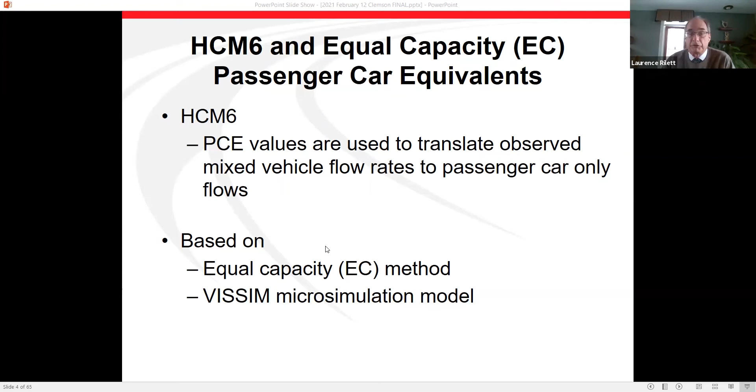This is the setup for the modeling done in the HCM6. You can see this is the standard model they use — an 8-mile section of flat road, then grades, with detectors at different lengths so they can model what happens at different grade lengths, and a level section at the end. They basically did a lot of simulations, and I'll talk about how many in the next few slides, but this is the general setup.

They can change the grade, change the grade length, change the volume, and the output from these simulations are what went into the HCM6. So when you're using PCE values from HCM6, it's actually coming from a VISSIM model — we'll go into more detail in a few slides — but I wanted to point out that this is a rather new way of approaching capacity and PCE calculations. There's a lot of innovation involved with it.

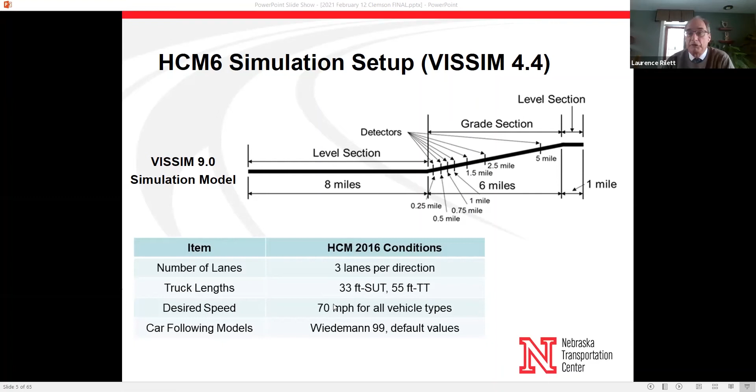What's interesting from the Midwest point of view is that the HCM6 was set up for 3 lanes in each direction, with a desired speed of 70 miles per hour for all vehicle types, cars and trucks. I'll explain why in the Midwest this may cause some issues when we go to use the values in the HCM6.

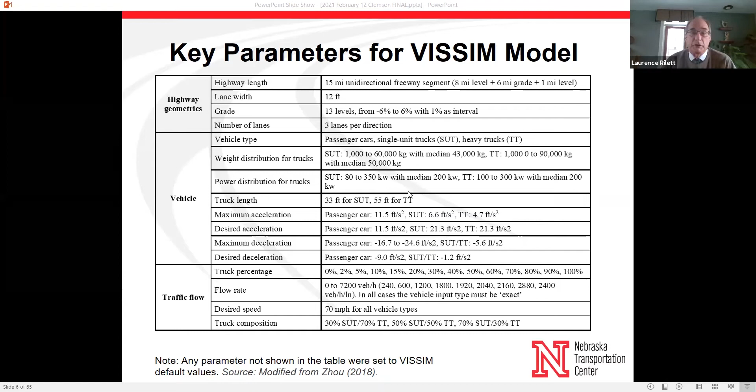Here are the key parameters for the VISSIM model. I only put this up not to go over each one, but to show you how detailed it is — geometric data, vehicle parameters, traffic flow parameters. It's a fairly sophisticated approach, as anyone who's used VISSIM would know. There's also driver behavior, data collection parameters, and simulation procedures involved.

I'm not going to go into great detail, but I did highlight one thing: the aggregation interval was 1 minute. So when the developers of HCM6 were developing the passenger car equivalents and capacity values, they used an aggregation level of 1 minute, which is new for HCM6 — historically it's always been at a 15-minute level. That was noticeable to us, and I wanted to point it out because some of the numbers may not coincide with what we're used to, since they chose a different aggregation level.

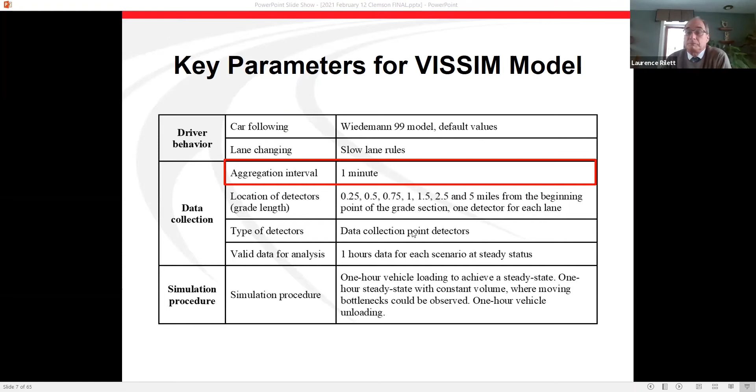To do the analysis and get the PCE values, they ran a number of scenarios using the VISSIM 4.4 model. They did passenger car only conditions: 91 scenarios with 13 grade levels and 7 distance levels. They also looked at 3,549 scenarios for mixed traffic with cars and trucks, varying grade levels, distance levels, truck percentage levels, and truck composition levels—the trade-off between single unit trucks and tractor trailers. All told, they did 3,640 runs using that VISSIM model and geometric design I showed earlier.

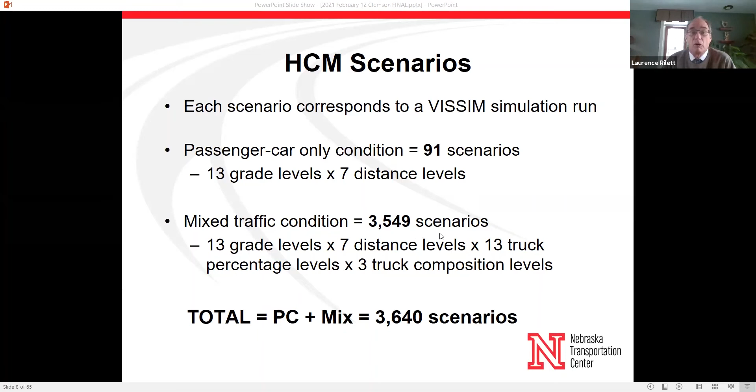Once they got that, they could calculate the PCE. The PCE value is a function of the capacity values obtained from VISSIM. For those 3,640 runs, they developed the capacity, and from that, calculated the PCE. It's easiest, I think, if we show it by example.

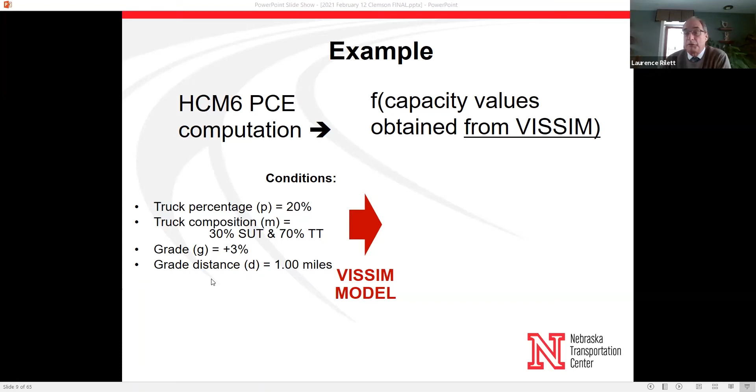In this case, I've taken a truck percentage of 20%, a truck composition of 30% single unit and 70% tractor trailer, a grade of 3%, and a grade distance of 1 mile. Once you have those parameters set, you can go and run your simulations, which is what the developers did.

Here's the passenger car only results. These are simulation results. On the y-axis is flow rate in vehicles per hour per lane. On the x-axis is density in vehicles per mile per lane. They ran different volumes—the green ones are low volumes, the red ones tend to be higher volumes. But you can see it's a fairly standard linear flow rate density curve.

From that, they calculated capacity, and that's the red line at 2,268 vehicles per hour per lane.

The other key point on this figure is that in HCM6, they took capacity when calculating PCEs as the 95th percentile flow rate instead of the 100th percentile. It's our understanding this is the first time this has ever been done in the HCM. I could be wrong, but it was unique to this characteristic, or to this section of the HCM.

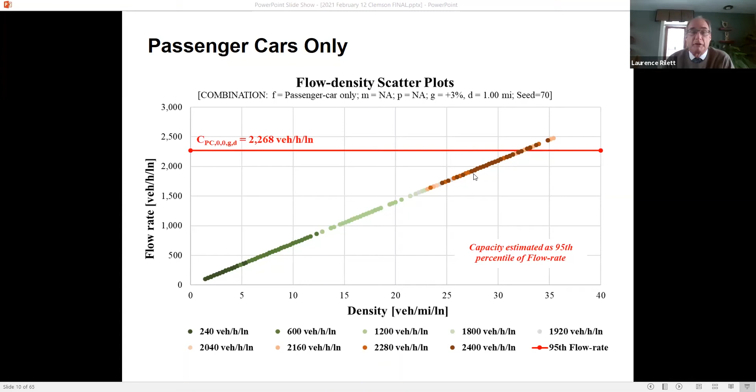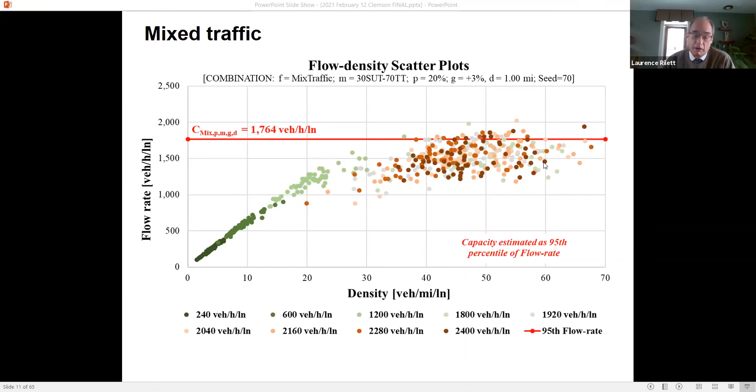Once you have those two capacities, so you do your conditions and get the capacity values, they then calculated a capacity adjustment factor, or CAF. Basically it's just the ratio of the mixed flow to the passenger only flow for the same conditions—same grade, same length. For this example, it's 0.78, so the capacity is basically 80% of the passenger car only for this scenario.

Once you have these CAFs, you can then calculate the PCE, the passenger car equivalent, for this scenario. Again, it's the equal capacity method—there's a formula for it, I'm not going to go into great detail, it's in the literature. But essentially for this example, the passenger car equivalent is 2.43. So essentially what it's saying is, for a typical tractor trailer under these conditions, one tractor trailer is equal to 2.43 passenger cars. And of course, they do this for all those combinations I talked about before.

It's a little more complicated, and I'm going to show that on the next slide. When they calculate EC PCE values in HCM6, this is what I just described: they go through and do the simulation runs to get the capacity, then calculate the CAF, which I showed. There's actually a step 3 where they take all those simulated CAFs and develop a multiple linear regression model, and use that to estimate CAFs, then from that calculate the passenger car equivalent. So they don't use the simulated CAFs directly—they run a multiple linear regression, calculate the CAF, and then calculate the PCE. These are the values, the output from this, that you see in the Highway Capacity Manual.

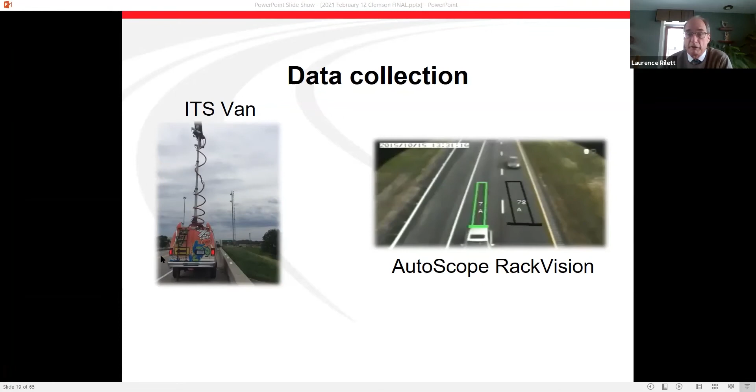So we went out and collected some data. We have a number of ways of collecting data at University of Nebraska - we have a van, we have trailers, we have automatic data collection. One of the things we collected in the rural areas was the free flow speed distribution.

The natural question is, if the vehicles are going at a different free flow speed, does that have an impact? Remember, HCM6 assumed they were all going the same speed, and what we're seeing in the field is they're different. These virtual presentations are always tough because you can't really ask questions, but assume that I'm asking you a question like, why would the trucks be so much different than the cars?

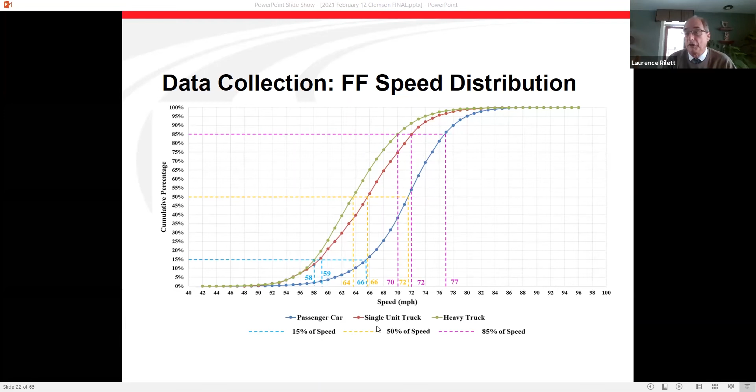The answer is because in the United States most trucking firms, almost without exception, have speed regulators or governors on their trucks. So even if a driver wanted to go faster, they couldn't. The governor is usually set around 65, 66, 67 miles per hour, so that's the maximum speed they're going to go. So you have this discontinuity where you have cars wanting to go very fast and trucks going significantly slower.

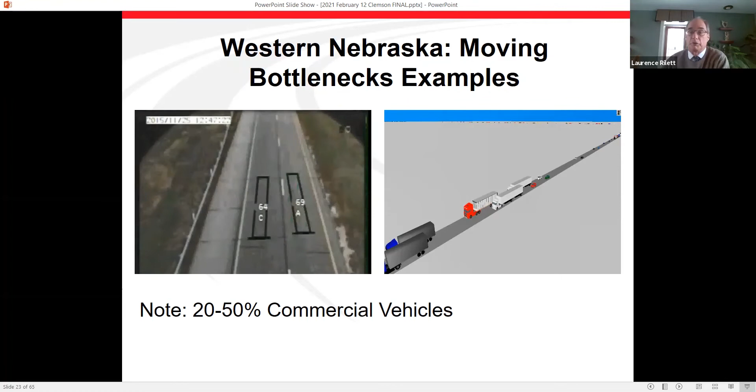So you get cars behind the trucks as they pass, and they can't go the speed they want. So the question we have is, is this captured in the HCM6? The other thing to note is that out in the Midwest, throughout the western part of the country, we get a lot more trucks, percentage-wise, than on the East Coast and West Coast. It's not uncommon for us to see 50% tractor trailers on our interstates in the western part, and even in a fairly populous area, we get 20 to 30%.

Mainly because we're a major transportation corridor - a lot of commercial vehicles are using the roads. So what we wanted to do was say, HCM6 is great, we have this simulation model - let's take the HCM6 approach, replicate it entirely, but for Midwest conditions. So instead of 3 lanes, we're going to do 2 lanes. Instead of the truck lengths being set, we're going to use the ones we observe in the field. Instead of the desired speed being 70 miles per hour, we're going to use the empirical speed distributions that we saw in the field.

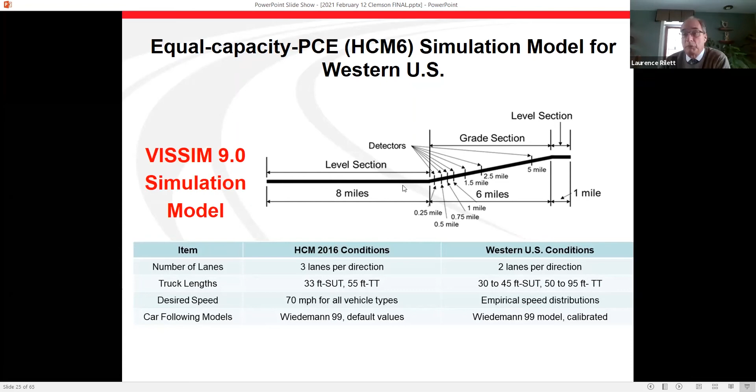The other thing I wanted to point out is that the HCM6 was developed with VISSIM 4.4, which is no longer available. At the time we were doing this work, we had VISSIM 9.0, so we had to spend time making sure the results we got from 9.0 were also compatible with the original HCM6. I was happy to report that for our consideration, 9.0 was able to replicate 4.4, and this point will become important in a few more slides. But for now, 9.0 was able to replicate the highway capacity manual results using 4.4.

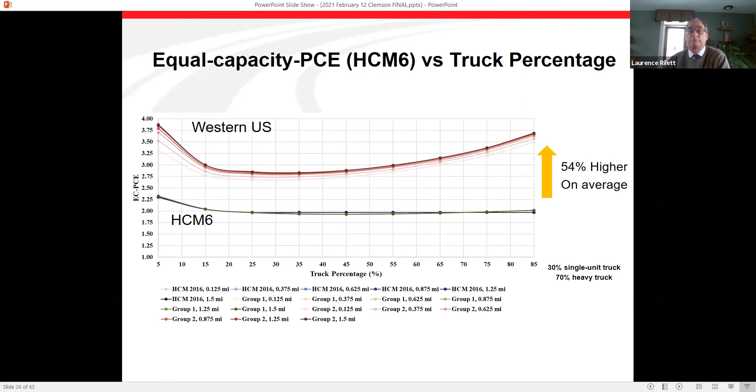The great thing about the HCM6 approach is that you can do lots of different sensitivity analysis. If you have different speed limits, we can rerun everything with the different speed limits. As you'd expect, as speed limit goes up, so if you're in Texas and you have 80 miles per hour, the passenger car equivalents are actually higher. And as the speed limit goes down, say 70 miles per hour in your area, the PCE values go back down closer to what's in the HCM6, although you can note they're not exactly the same.

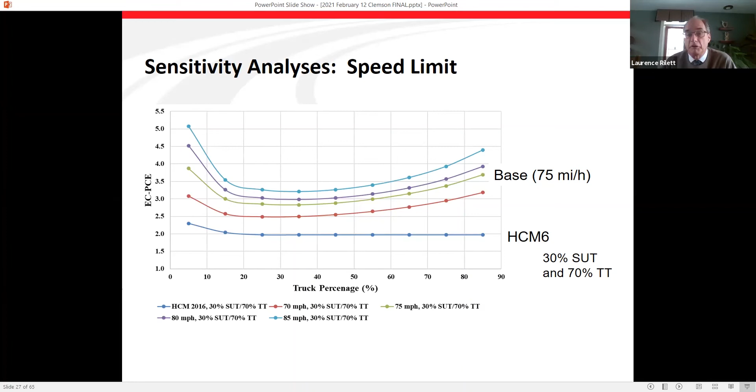You can also do analyses on truck lane restrictions - what happens if we restrict passing? This came about when I was talking to one of my European colleagues, and I was explaining what we were doing, and he said, well, I don't understand the problem. I explained again, we have these trucks passing each other, moving bottlenecks. It turned out that in Europe, they don't allow trucks to pass for this very reason - trucks go slower, they're not allowed to pass, so they have to stay in the right lane.

If you do that, what this graph shows is that the more restrictions you put on, the smaller the PCE value. If you completely restrict passing, you actually get very close to the HCM6 values. So the lesson there is, if you restrict passing and don't allow trucks to pass each other, the HCM6 values would work very well in Nebraska. But since we do allow trucks to pass, they're off by about 50%.

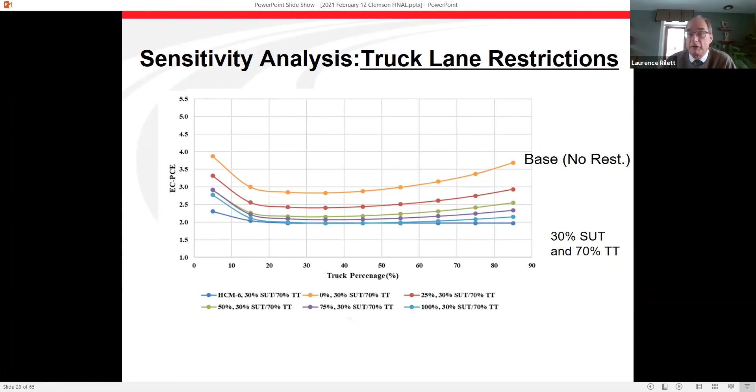The second thing I wanted to talk about was step 3 of the model - the freeway capacity, same thing on HCM6, but step 3. If you remember, steps 1 and 2 are running the simulation model. Step 3 is the multiple linear regression model, where they relate the CAF, the capacity adjustment factors, to a number of variables. If you read the original documentation for the HCM6, they actually have 15 parameters. This is the model - I'm not going to go into all the parameters and details behind it, but you can see it's fairly extensive.

It also explains why we still have tables in the HCM6. One of the things is you have this great model - maybe you could have put the model in the HCM6, but it's just too complicated to use, so they opted for the tables. What we were curious about is whether we could come up with a simpler model for this step 3.

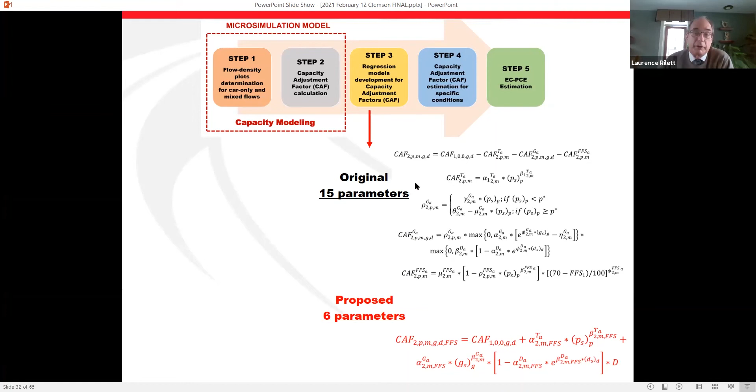The average error was about 0.6%. One of the things we're advocating for in the next HCM is to get rid of the tables and come up with a simpler formula that works, so you can just plug in your values to get your PCE, rather than trying to interpolate and extrapolate from tables. So that's one of the things that we did. The lesson is you actually can make this modeling a bit simpler.

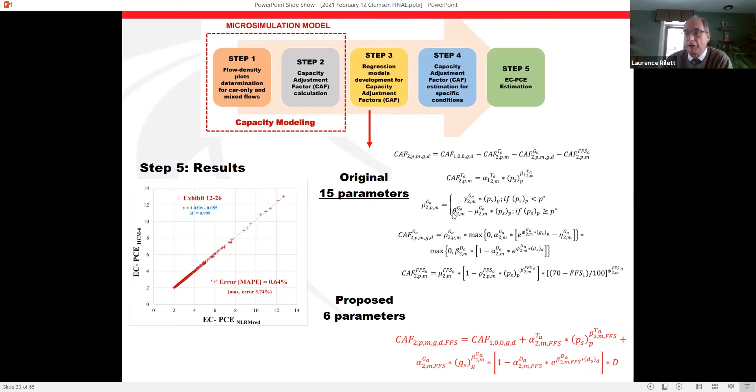And again, it comes about all because they're doing simulation. Trying to do this with actual empirical data is a bit of a problem. The last thing that's really interesting about the HCM is that you can do new things, like connected and automated vehicles.

We were looking at platooning, so the effect of truck platooning, obviously very important in Nebraska. What's great is a lot of people go and do a connected vehicle analysis, and then they'll compare it to the HCM, but we're never quite sure if the difference is because of their model or because of the connected vehicles.

So what we wanted to do is use the exact same methodology, calculate the PCEs with the same truck characteristics and everything else, and see what happens. And as you'd expect, the PCEs for connected vehicles are about 34% lower than the HCM6. The key finding is that you can actually compare it using the same approach used in the HCM, putting in the vehicles and trucks operating differently, making an apples-to-apples comparison.

There was also an issue we found, a lesson learned, that to do the platooning and connected vehicles in VISSIM you need VISSIM 20. It's not backwards compatible with VISSIM 9 or VISSIM 4.4. So if you took VISSIM 20 and tried to replicate the HCM6 analysis to get the PCE values, you would not be able to do that because they made changes.

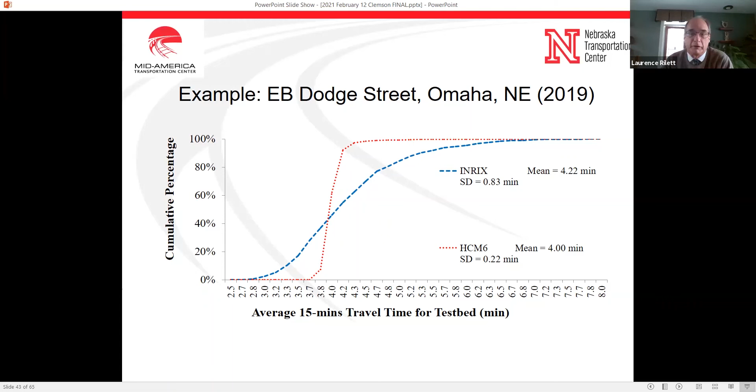We repeated this. At first we thought maybe we just picked a bad corridor, so we picked 5 test corridors in Omaha and Lincoln, and looked at 9 scenarios, eastbound and westbound.

What we found is that we underestimated the mean on average by 10.6% using the HCM procedure, with a range of 1 to 31%. The variance was underestimated by 51%, with a range of 14 to 83%. The reliability travel time metrics were underestimated by 10 to 50%.

In general, the more congested the corridor or arterial road, the worse the results. So these were not very beneficial — we found that the HCM6 reliability method really didn't apply well to our cities in Nebraska.

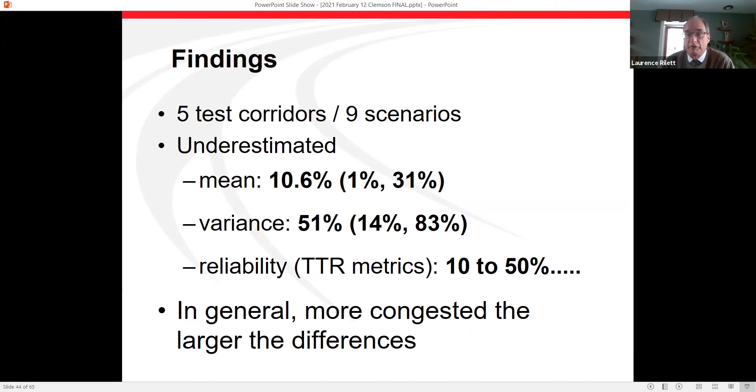So then we thought, is there a way to calibrate the model? Can we go through this fairly complicated program, change the model parameters in the HCM6, run it over and over, and get a calibrated model? The answer is yes.

So one lesson for us was that the HCM6 reliability model didn't work very well on our arterial roads, but if we were able to get arterial data, we could calibrate it so that we could replicate what we were seeing in the field.

So the lessons learned: HCM6 is very innovative, using simulation, VISSIM, and Monte Carlo methods. It's very powerful — instead of one set of PCE values, we can now calculate PCE values for different parts of the country based on their local conditions. That's the strength of it.

The negative is that you have to go through, in our opinion, validating and calibrating the results rather than just taking them and using them directly. There's also the issue of compatibility.

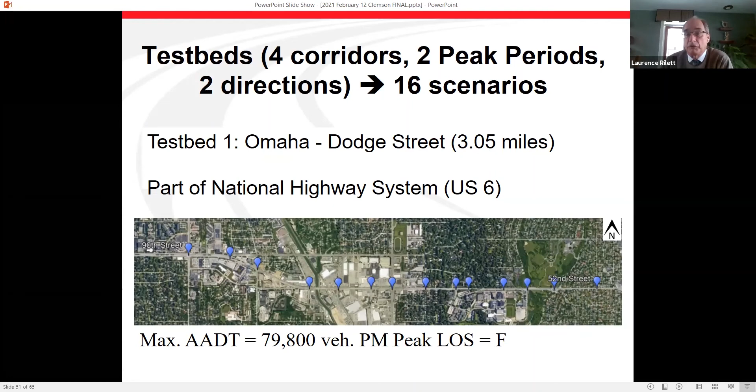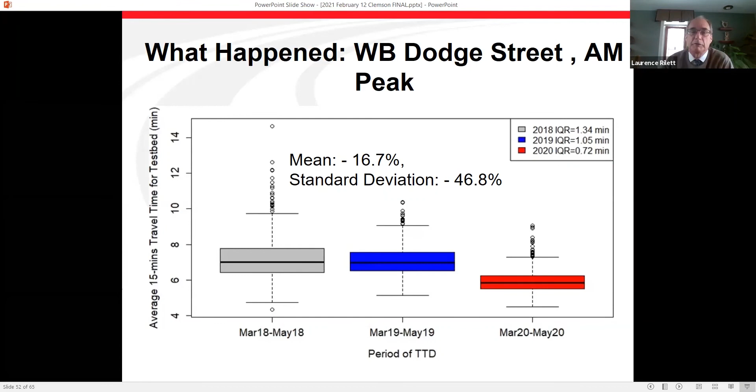Most people go, yeah, of course, that's sort of what everyone's experience was — there's not a lot of traffic, it's easier to get around. We looked at all 16 scenarios. The average drop in mean was from 7.1 to 23.2%, with an average 14% drop. Standard deviation dropped 16.5 to 69.4%, with an average drop of about 43%. As I said earlier, there's lots of definitions of reliability, but our conclusion was that travel times became more reliable no matter what definition you wanted to use. The mean's down, there's less variability — almost any citizen would say the roads are more reliable.

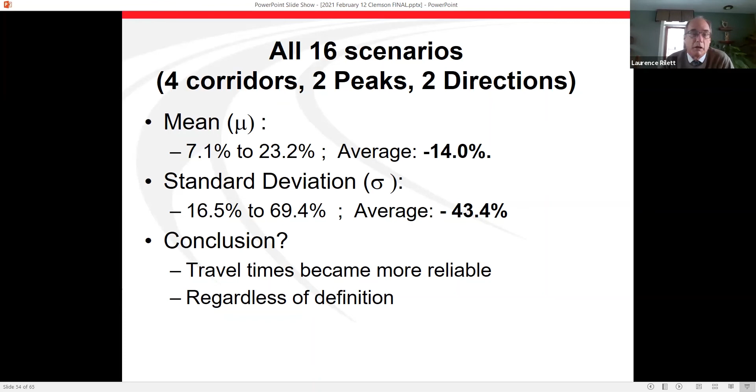So given that intro, the next question we wanted to look at was: what about the metrics we use to measure reliability? We showed that reliability is better — but what about the metrics? It turns out U.S. transportation agencies, by and large, don't use common statistical metrics like mean and standard deviation. The general argument is that users won't understand it if we use statistical terms. So they've come up with a wide range of metrics: travel time index, planning time index, level of travel time reliability, buffer index, and more — but these are probably the four most popular.

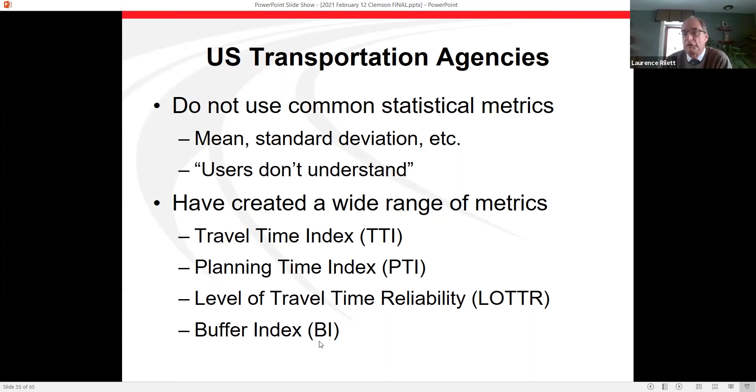The travel time index is the mean travel time over the free flow travel time. The planning time index is the 95th percentile travel time over the free flow travel time.

So one is how, on average, does it compare? And one is, what's the worst you can do compared to the average when there's no one around?

The level of travel time reliability is the ratio of the 80th percentile travel time to the 50th percentile travel time, so some measure of variance to some measure of mean or central tendency. The buffer index is the 95th percentile minus the mean. So this variability, the 95th to the mean, is a measure of variance over a measure of central tendency - how much spread is there versus the average value.

So the question I asked at the beginning was, were the arterial roadways more reliable during the pandemic? We looked at the average across all those 16 scenarios, for all the arterial roadways we looked at.

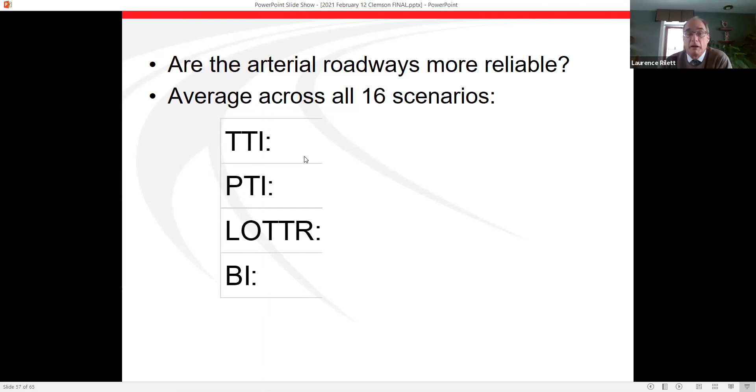We found that the TTI dropped 14%, the planning time index went down 19%, the level of travel time reliability went down 3%, and the buffer index went down 34.3%.

So the answer to were they more reliable really comes down to what metric you use. It shouldn't be surprising that they're so different because they all measure different things. And it comes back to the fact that we don't have a common definition for reliability.

The other lesson I wanted to point out is that the one showing the least difference, the level of travel time reliability at only 3%, is the one that FHWA uses to measure reliability in the field. It's actually put into MAP-21 and the FAST Act.

Our argument is that most people would say reliability improved during the pandemic, and we are using travel time reliability metrics that actually don't pick up that change.

So I think it's a good opportunity for us to look and revisit these decisions on what reliability or any metric measures. If it can't pick up these changes, it's really not going to pick up future changes.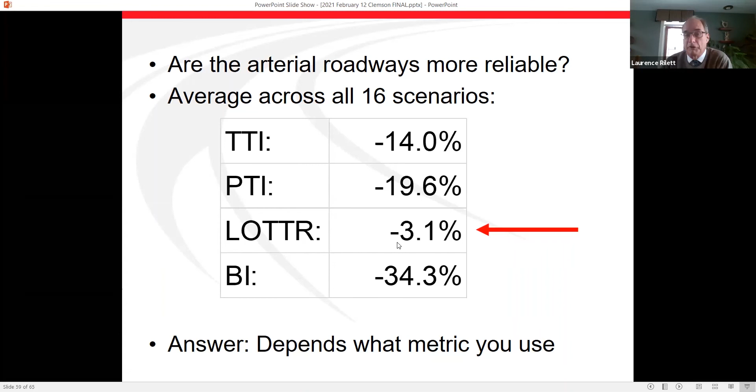We have our own view, I'm not going to go into it here, but my own belief is that we should really stick with statistical measures when measuring reliability rather than using these types of metrics. But again, that's a philosophical argument, not an engineering argument.

So, lessons learned from COVID-19: it obviously had a profound effect. It's a natural experiment. Crash rates went up - are we less safe? Travel time reliability is about the same if we use the level of travel time reliability metric.

Is that really accurate? So the lesson from my perspective is that reducing complex systems to simple metrics can be misleading. What I always tell my students is: know your data and know your statistics in order to make meaningful inferences.

So it's great to go use these numbers and say things, but I always try to look at the actual data and make sure that the data and the metrics are actually consistent with my feeling of what's going on in the system. So in terms of concluding remarks over the entire talk, as I said before,

I wasn't going into any great detail on any of the models we were developing, but I'd love to follow up with anyone if they did. I was looking at it at a much higher level in terms of the lessons we found. Simulation is great - it can be applied anywhere at a very low cost.

The HCM has begun to adopt these. It's very powerful, and I hope I showed that. We can actually do HCM6 work on our own local areas, but there are challenges, and the challenges are really calibrating and validating it to local empirical data.

But I think this is a real opportunity for us to develop regional values from the HCM6, and it may be in the future, instead of having a set of tables, we just have a set of tools we can use to get the values for our specific application.

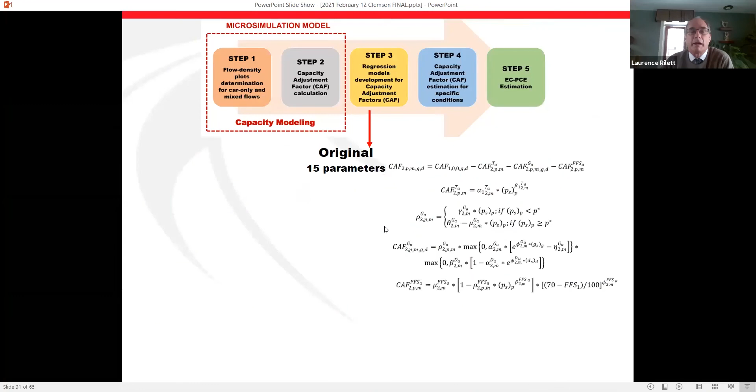Sure, let me find it. Sorry about that, let me come to it. I'll take just a few slides. This is actually Antonio's work looking at these, examining different aspects of it. What I really wanted to get across is that it's possible to take the HCM6 methodology used to develop the PCE values in the HCM, use the exact same assumptions, and get the same results for passenger cars, then put in different variations of CAV technology. In this case, we used platooning from the CoEXist project, but if you didn't like that, you could put in any model you wanted.

How do they communicate? How close do the platoons get together? Does it always have to be the same trucks, or can they be different trucks? All of these are sensitivity analyses you can run. In our case, when it was 34%, we had a series of assumptions that we liked, but the point I wanted to make is if you don't like our assumptions, you can build your own model. It's very easy now to run the model and compare it to the HCM6 values. Right now, the issue, in my opinion, is that people run simulation models and compare them to HCM6, but they're comparing apples and oranges because the assumptions aren't all the same. So it's a good question.

What I like about the model is that we can go through and do anything we want, and then argue about things like communication, how close the platoons are created, and whether there are rules on maximum size. All of those things are looked at, I just didn't cover them in this talk because of time.

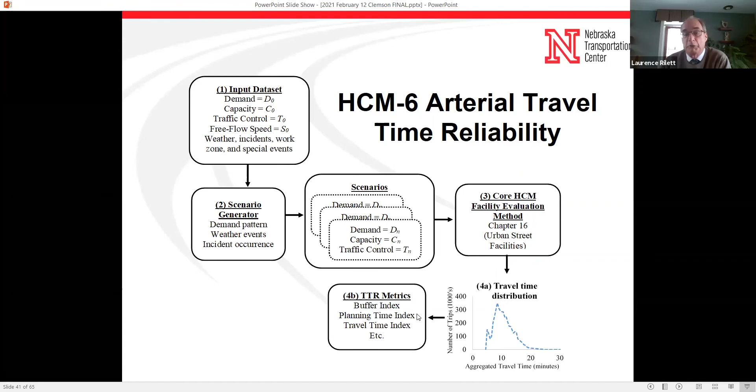So each time, for each scenario, they run a simulation: okay, today, this 15-minute period, there's bad weather, the volume is this, and then they go through and calculate the travel time, and then they do it again. So it's a Monte Carlo simulation. So basically this is their scenario, they get a travel time, they get the metrics, and what we were finding, of course, was they weren't matching.

So what we went through, what we were doing was changing the input parameters to the STREETVAL engine. In particular, what we were focusing on was the demand. They have a demand, you basically put in an average AADT, and they have demand functions in the HCM6 to calculate the travel times. We were calibrating those demand functions so that we could replicate the travel time, adjusting the input parameters to the HCM model so that eventually we would come up with a distribution that matches.

I'd be happy to talk offline on it because it's a little bit more complicated than I'm saying, but the reality was we were adjusting their input values in their model so that we could replicate what we were seeing in the field. And then we were trying to come back and estimate, well, now that we've made these new demand changes, do they have any physical meaning, or are we just adjusting factors so that we get what we're seeing in the field? As you can imagine, the demand profiles in the HCM were very tight, and by expanding them out, saying there's more variation in demand, that was giving us more variation in travel time, which allowed us to replicate the travel times. That's essentially what went on.